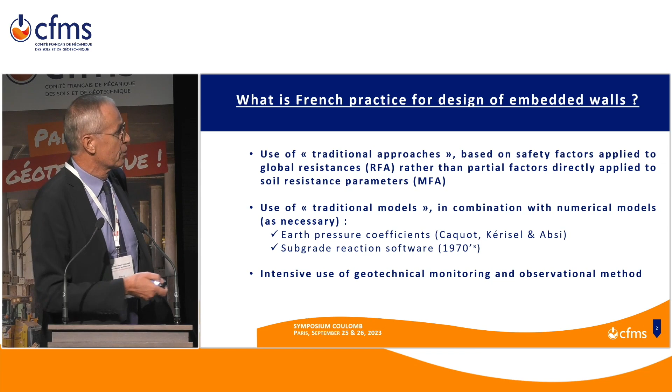But on the other hand, it seems that all existing and traditional models are relevant, provided that they are used within the limits of their validity range, which is maybe the most difficult thing that we have to assess in practice, because we are never very well aware of limits of models. We do not communicate enough on that. And clearly, this morning, I will try to focus on the limits of the models we use.

A quick mention of our practice for soil investigations. As everywhere, of course, we are combining lab tests and in-situ tests.

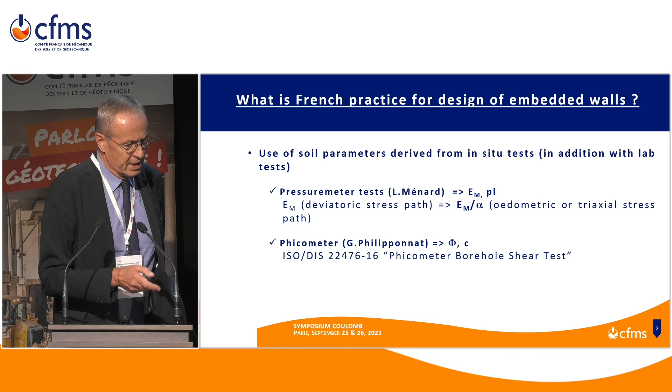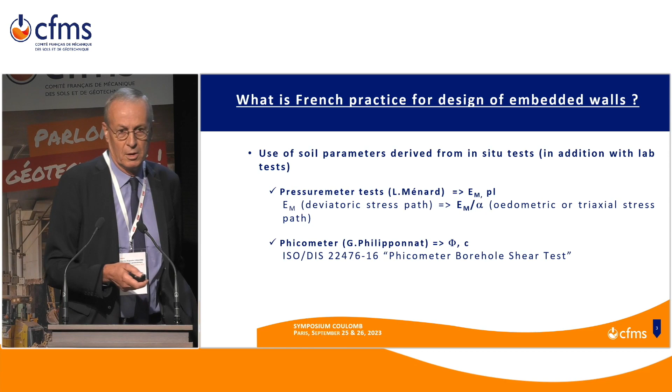I would just like to mention two specific French tests. First, the well-known pressuremeter developed by Louis Ménard, resulting in measurements of the pressuremeter modulus EM and the limit pressure PL. It's important to remind that as EM is measured in a purely deviatoric stress path, what Ménard called an extension stress path, to which some categories of soils may be more sensitive than others, some of them being potentially affected by early plastic strains, it was necessary for Ménard to introduce the structure coefficient alpha, which may itself be correlated to results of cyclic tests, as shown by Jean-Pierre Baud and by Yves Canepa, finally resulting in the reference modulus EM over alpha that we currently use for projects, and that better represents typical oedometric or triaxial stress paths, or more generally, stress paths including a significant isotropic component.

Less known is the Phicometer developed by Gérard Philipponnat, which completes the measurement of pressure exerted on the borehole wall by a measurement of shear resistance, so that it's possible to have an in-situ measurement of these two important parameters in Coulomb's criterion: friction and cohesion. Good news is that this test should, in the near future, be the object of an international ISO standard, the Phicometer borehole shear test.

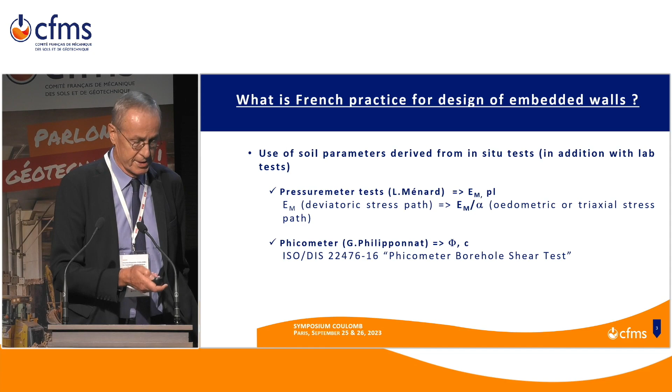Now, getting to the heart of the matter, I will briefly mention this very important ultimate limit state for embedded walls, what Eurocode 7 calls the rotational resistance. That just consists of checking that the embedded part of the wall is sufficient to mobilize the required level of passive resistance.

We are typically currently doing that, just checking that the ratio between the available resistance derived from passive earth pressure coefficients and the mobilized resistance derived from SLS, serviceability limit state calculations, is not less than a ratio typically in the range between 1.4 to 1.9, in line with the requirements of the resistance factor approach.

This is indeed different from the MFA, represented on the right, that requires producing ULS calculations, including partial factors applied to friction and cohesion, resulting in both a reduction of passive resistance and an increase of active pressures, and finally a significant effect on ULS solicitations and structural design.

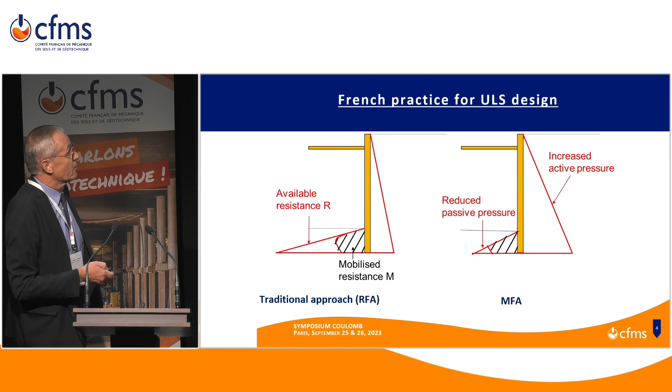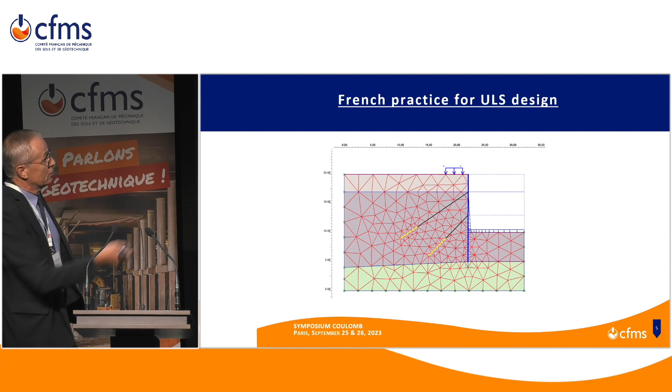Of course, this was the object of many discussions during the Eurocode process, and many comparisons were made. I would like to present one provided by Christophe Baudouin, the example of a sheet pile wall with two levels of anchors, for which a comparison was provided between the blue curve and others.

The blue curve represents bending moments derived from SLS calculations, so without any partial factor being applied. The red curve is derived from the blue curve by applying a multiplicative factor of 1.35, in line with classical structural calculations for ULS design.

That is our practice. The green curve derives from MFA with partial factors of 1.25 applied to friction and cohesion, for tangent of the friction angle and cohesion. We can see that the effect is very significant.

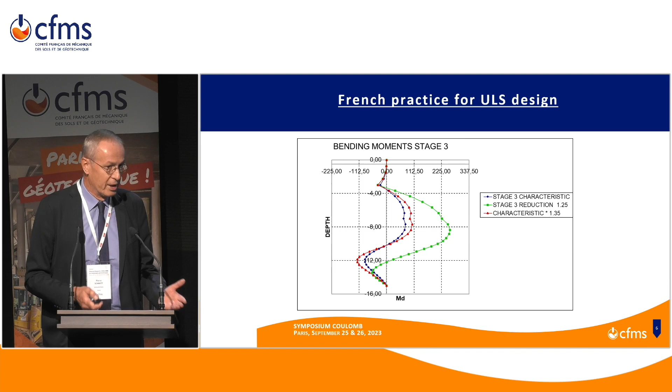Even if it needs to be emphasized that structural codes for steel structures make it possible, and even recommend, to consider plastic hinges within the structure of the wall to create some redistribution and finally reduce these huge bending moments. But unfortunately, this is not common practice for thick concrete structures such as diaphragm walls, although it is, in that case, of the utmost importance to avoid excessive densities of steel reinforcements that could prevent proper concrete placement under bentonite mud. This may explain why, in fact, we definitely prefer the red curve compared with the green one.

Even if we are, of course, aware that 1.35 is not such a high safety factor to deal with all geotechnical uncertainties, so that we need to be very careful when considering properly geotechnical limit states.

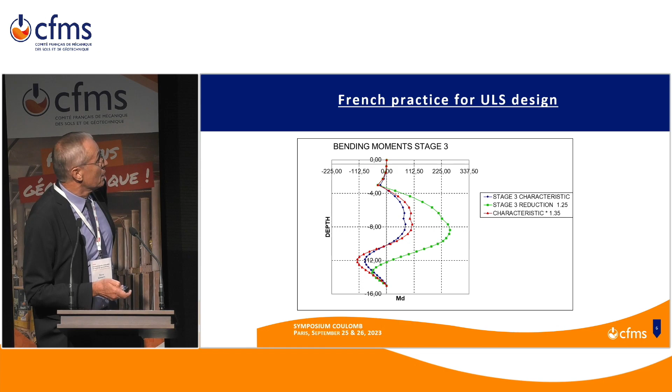A question that arises is when moving from left to right, how can we be sure that we are not crossing the borderline delimiting the validity range of conventional models we use, relying on Coulomb's method or active earth pressure coefficients, since there is an implicit assumption that overall displacement is equal to 0, or at least small enough to ensure no risk of the soil mass moving toward the wall, preventing decompression and entering a passive state instead of an active one.

This is a limitation that the model itself cannot predict, since it doesn't pay attention to overall displacement. So maybe in practice, the only indicator we have to check this is the safety factor relative to overall stability.

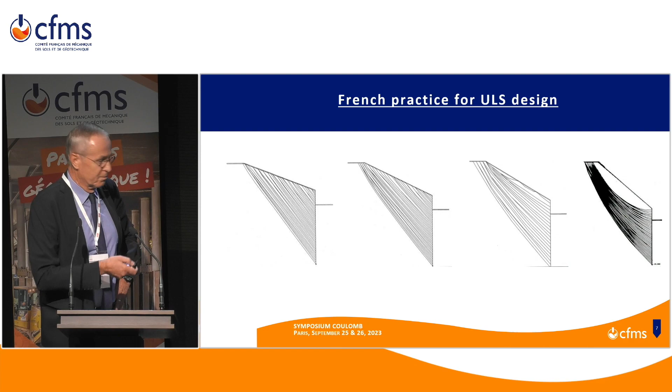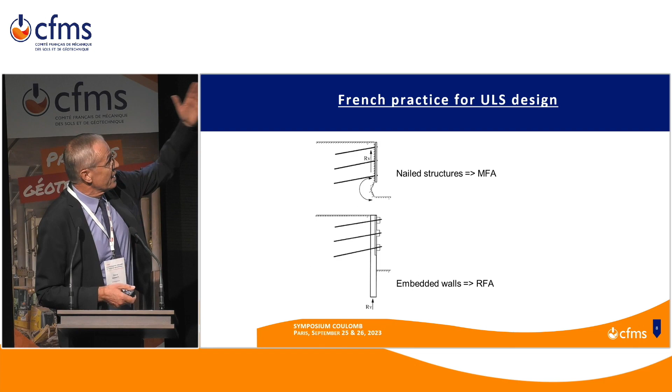Finally, to conclude with ULS practice, in France we do not hesitate to consider different design approaches for different structures. For instance, for nailed retaining structures built during excavation, which generally have lower safety factors and non-negligible displacements, conventional models clearly do not apply, and we rather design by reference, the same way as for reinforcing elements in slope stabilization projects.

It seems relevant here to apply MFA, making the structural design directly linked to the results of overall stability calculation with partial factors applied to it, which is different from the situation for embedded walls, where we are farther from geotechnical limits and conventional models generally apply. In that case we preferably use RFA to better optimize the structural design. This is our philosophy.

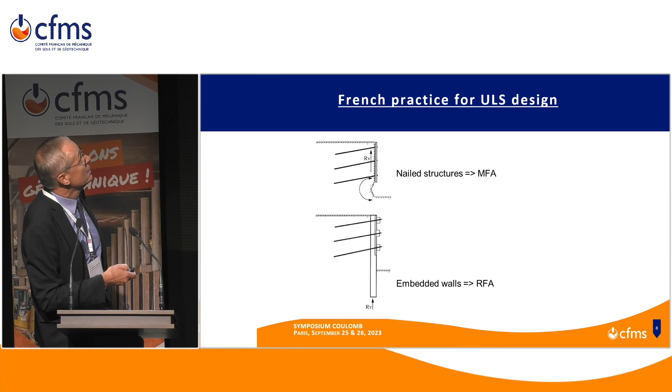The principle is to ensure that the anchor force applied in the soil is far enough from the wall to be dissipated by internal shear resistance within the soil, without generating an interaction with the wall or a possible increase in the active pressures considered in the design.

If the criterion is not met, it does not necessarily mean we are reaching an ultimate limit state. In fact, it's not really a safety factor that's required, but rather an indicator that if the criterion is not met, we need a more sophisticated model to account for the interaction that traditional models cannot consider.

The anchors are much too short compared with the great depths of the excavation, so we clearly had to use finite element calculations, and also adjust the construction sequence by undertaking the deepest excavation stages using a top-down sequence, while the upper slabs were simultaneously constructed, in order to take the part of the reaction that the short anchors themselves were no longer able to equilibrate.

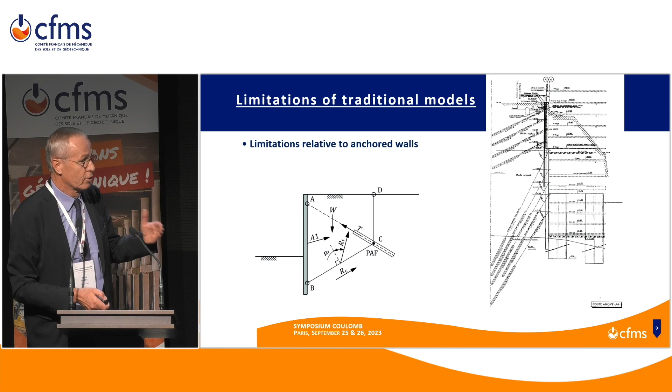Finally, geotechnical monitoring showed that the model was realistic, which would obviously not have been the case with only traditional models. Another limitation, already mentioned yesterday by Emmanuel Bourgeois, is relative to arching effects.

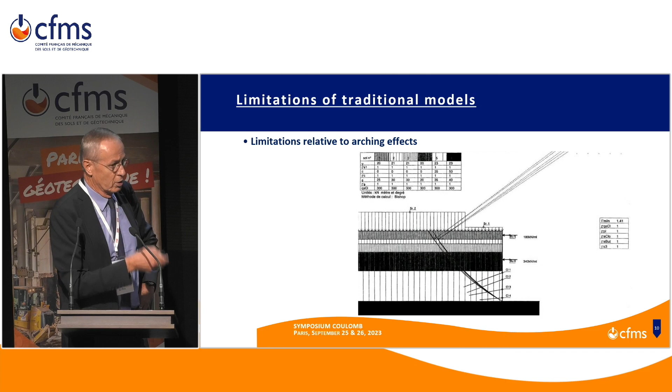In such circumstances it would surely be a mistake to rely only on traditional models, because as finite element calculations show, there is significant displacement at the level of the weathered rock, resulting in a vertical arching effect, and finally mobilization of passive pressure behind the wall at the level of the second layer of struts, with an increase in the reaction taken by this level of struts.

We presently have no indicators for that, other than common sense, recommending when using traditional models, especially when there is no water so all the action comes from the soil itself, to avoid mixing different rigidities of supports, as in this project, or when walls are flexible, to avoid excessively high spans between two successive levels of supports, especially when supports are passive, because traditional models will not consider the possibility of passive pressures outside unless supports are pre-stressed. So this is indeed a limitation that needs to be considered.

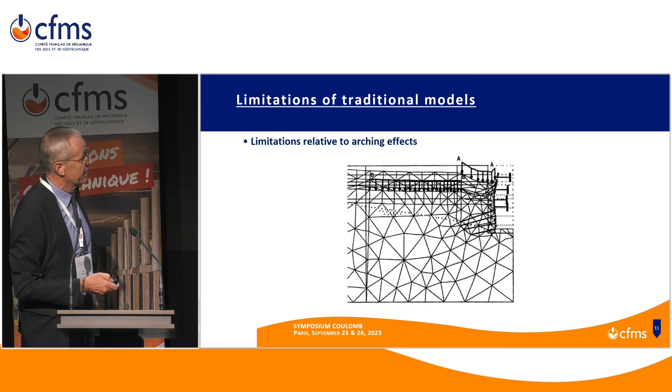Now looking at what occurs on the other side of the wall, I must confess I feel a little confused presenting, in front of scientific assistants today, such a basic model as the subgrade reaction one. It consists in representing all the stress-strain behavior of the soil on the passive side, between plastic limits, by a single spring coefficient supposed to represent everything, based on assimilating the soil to independent springs. That is obviously not very realistic.

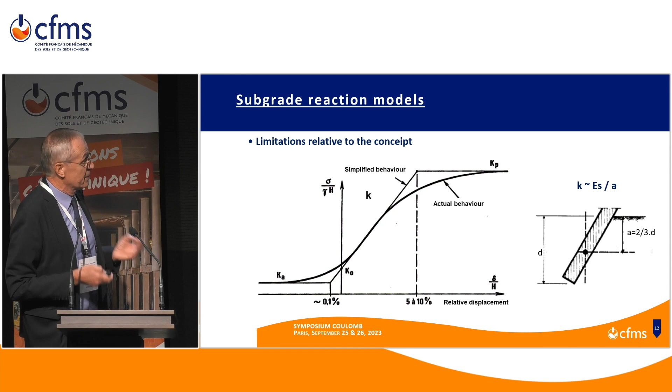The answer lies in the geotechnical monitoring we undertook from the beginning of the 80s, which showed, as in this example taken from the construction of the first line of the Lille Metro, that this model may provide good results compared with topographic and inclinometer measurements. But of course major adjustments are necessary.

First of all, the assumption A equal to 2/3 of D: we can see here that it may be relevant for the last stage of excavation, but not for the intermediate ones, because for the intermediate ones the embedded depth is much higher, although the interaction height A seems to remain of the same order of magnitude.

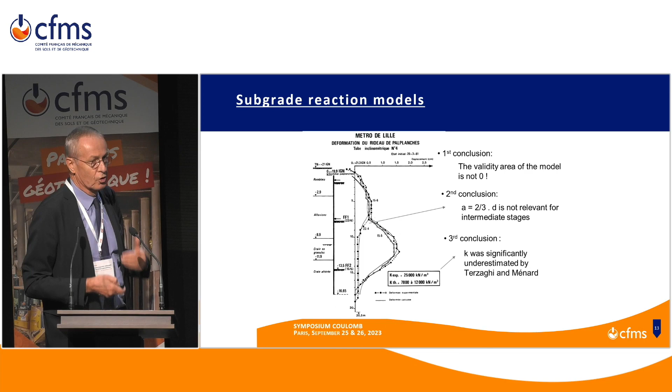Also, initial predictions and estimations by classical authors such as Terzaghi and Ménard were significantly underestimated. So a lot of back analysis was necessary before coming to a synthetic expression. Of course results are very scattered, but an average figure is provided by this formula: K equals 3.6 times our reference modulus Em, upon alpha, divided by A, which is about 3 times higher than initially proposed by Ménard, probably based on an extrapolation of databases mostly relative to foundation structures.

But what is difficult here is that at design stage we don't have inclinometers to provide a relevant value for A. So we have to rely on the so-called theory of beams resting on elastic supports, beam-on-spring models, assuming for instance that the embedded part of the wall may be assimilated to a vertical beam, the object of which is to transmit to the soil under the excavation the overall forces exerted by the upper part of the wall.

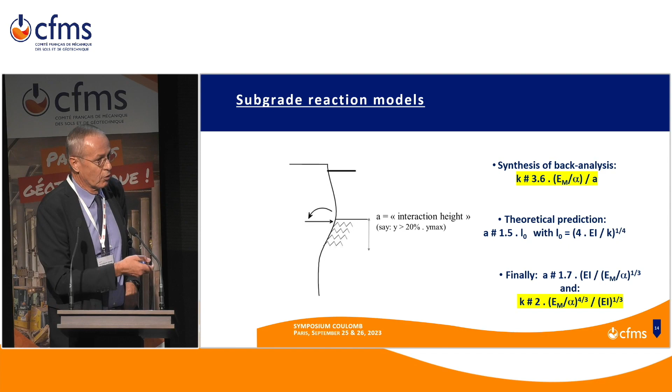Then the theory may provide an analytical expression of the interaction height A, which is in the range of 1.5 times the elastic length, itself traditionally expressed as 4 times the bending inertia of the wall divided by K, to the power of 1/4. So finally, A depends on K and K depends on A. Mixing these expressions, we get an expression of A that is surprisingly and generally in good agreement with inclinometer results, and an expression of K that only depends on the soil modulus and the bending inertia of the wall, which we currently use for projects with reasonably good results.

As shown in this example, taken from a project in Colombes near Paris, for which we were very happy to have very dense and high quality soil investigations, we were very happy to achieve, without any back analysis being necessary, a perfect matching between results of calculations and inclinometers in all monitored sections.

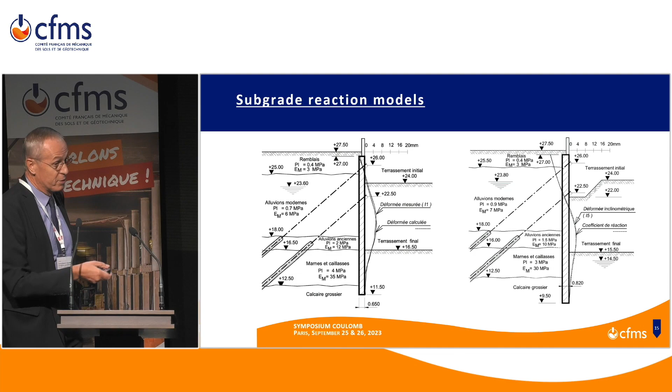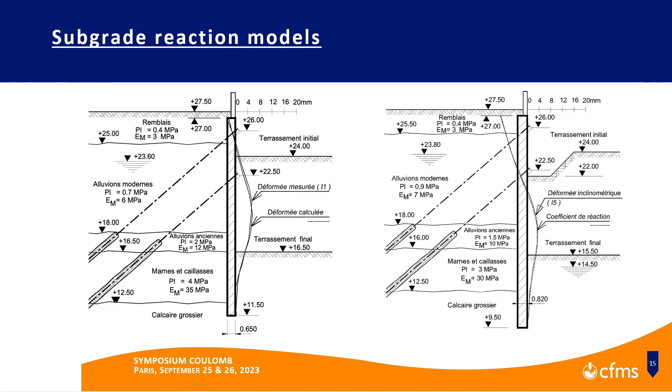But it is important to notice that this may occur, so there is no objective reason to reject this model. Now, the question, as I said at the beginning, is what are the limits of the model? Because obviously there are limits. For instance...

Limits may come from deep water pressures. For instance, it may occur that the embedded part of the wall is subject not only to mechanical forces, as in the general situation shown on the left, but mostly to hydraulic pressures, more especially when the wall had to be deepened to reach an impervious layer at depth for water tightness reasons, or when we are making pumping tests without any excavation.

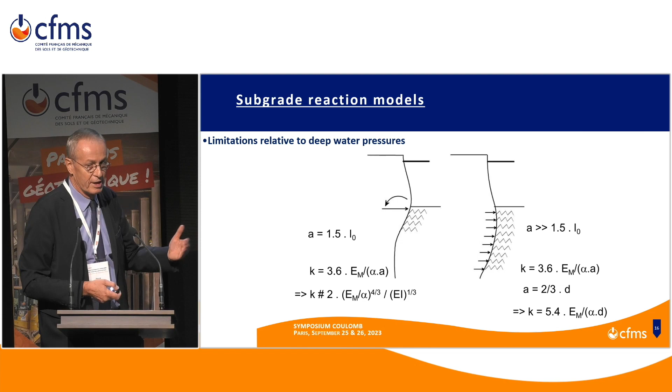In both cases, we can observe that A is no longer dependent on L0, but may reach in practice the total length of the height of the wall, or 2/3 of it, resulting in much lower values of K than predicted by the formula.

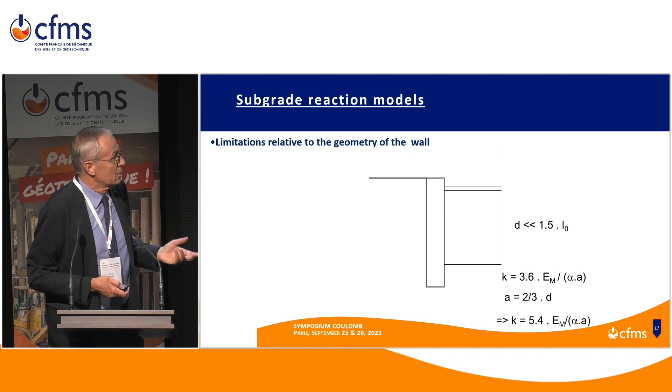On the contrary, it may occur that for short and rigid walls, the elastic length L0 may be huge compared with the depth of the embedded part of the wall. In that case, we clearly have to limit the theoretical expression of A to the physical height of the embedded part of the wall, or 2/3 of it, as proposed by Ménard, resulting this time in a higher value of K.

For cut and cover sections, it may occur that the 2 facing walls are close to each other, possibly resulting in interpenetration of passive wedges, causing an underestimation of passive resistance by both passive earth pressure coefficients and also by the subgrade coefficient. This can sometimes be reasonably approached by Hooke's formula, considering the shortening of the trench of soil between the 2 walls, so another evaluation may be necessary.

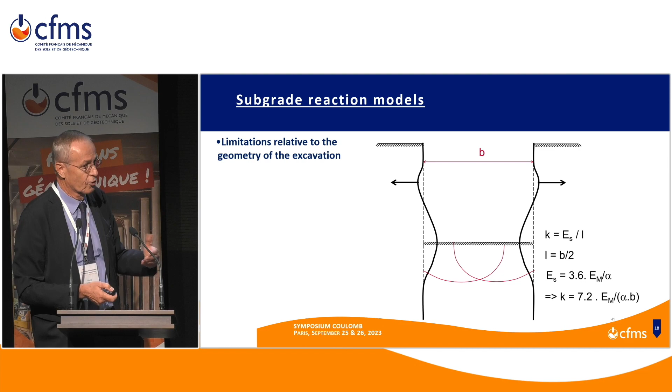Another limitation may come from time effects. In a project where we were happy to have very good matching between results and measurements, we were also happy to have long-term measurements, which doesn't very often occur. We could see that 1 year after the end of excavation, there had been, of course, some significant creeping of concrete.

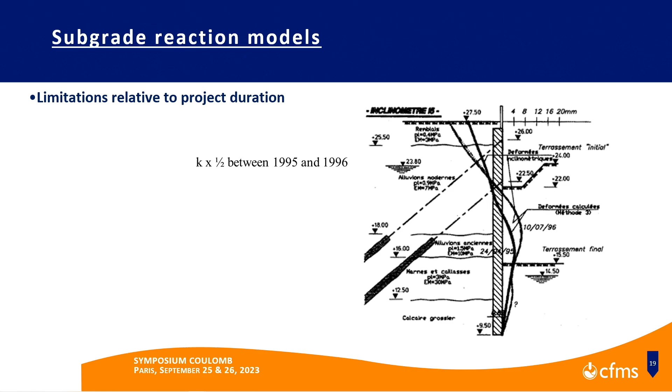That had been considered in the calculations, but we also had to divide by 2 the coefficient of subgrade reaction, which had not been really anticipated and was probably due to the creeping of the alluvium material under the great forces exerted by the permanent anchors.

But we still need to progress in our knowledge, more especially because we have to confess that our databases are mainly relative to short-term conditions, since unfortunately geotechnical monitoring generally stops after construction is finished. So we would need more long-term measurements to progress.

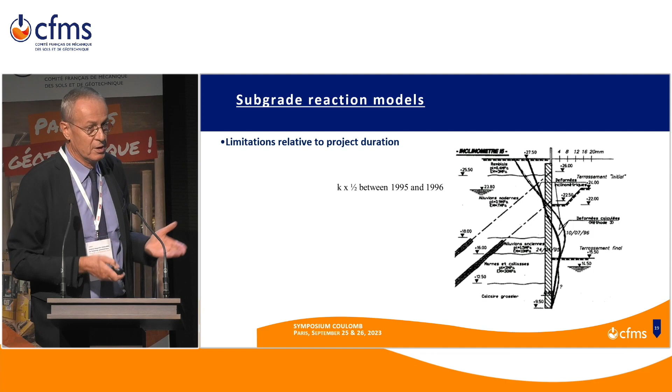But finally, you could say, okay, let's take the point that traditional models may provide good results, but isn't it a little bit complicated to always be aware of the limits, always aware of the physical mechanisms involved in the project itself? Wouldn't it be simpler to systematically use numerical models that account for everything, where you just introduce data into the computer and wait for the results?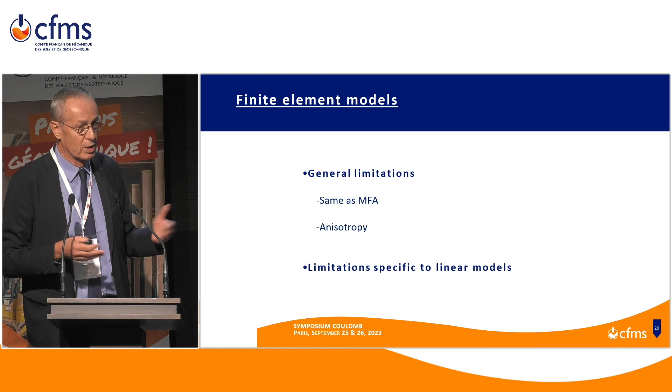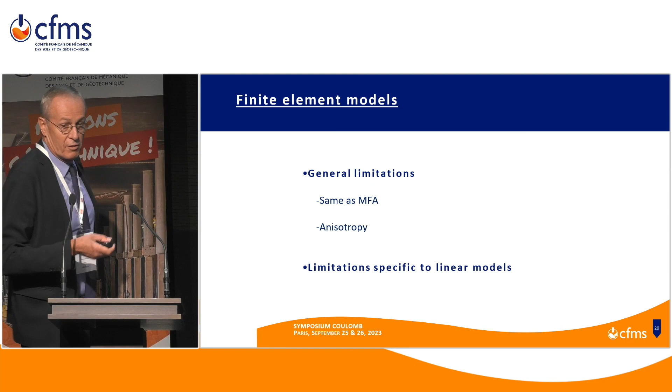Clearly in France we do use numerical models, but we're not prepared to use only numerical models, for various reasons. One of them is that these models in practice are not so simple to use for many practical and geotechnical reasons.

There are also some limitations. One is relative to ultimate limit state calculations, because generally numerical models are used in combination with MFA, since it is much easier to place partial factors on friction and cohesion. But for reasons I tried to explain, we are rather reluctant to use the MFA systematically.

Another limitation is relative to anisotropy, because there seems to be a consensus in practice to neglect anisotropy, since that would necessitate more sophisticated models and parameters to measure. But it may occur that alluvium soils are significantly anisotropic, which may explain why sometimes we were a little disappointed when comparing with geotechnical monitoring results, especially when checking both horizontal and vertical displacements. So this is also a small limitation.

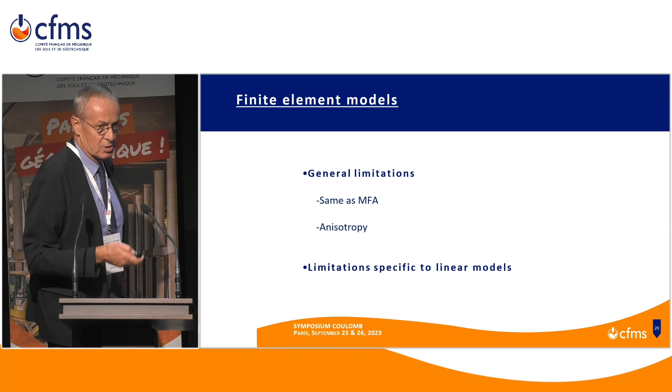Another limitation, also mentioned by Emmanuel Bourgeois, is relative to linear models, to the point that during the Eurocode discussions, it was sometimes considered that it would be wise to prevent the use of linear models for excavation projects.

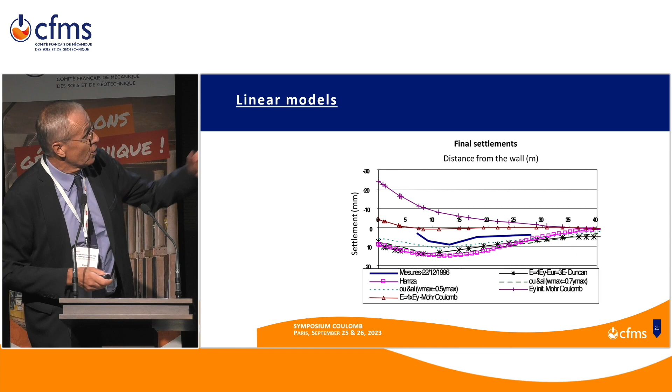The reason may be understood based on this example from the construction of the second line of the Cairo metro, where purely linear calculations significantly over-predicted the heave due to excavation, which was a huge unloading. Correct orders of magnitude compared with measurements could only be provided by non-linear models or by empirical formula.

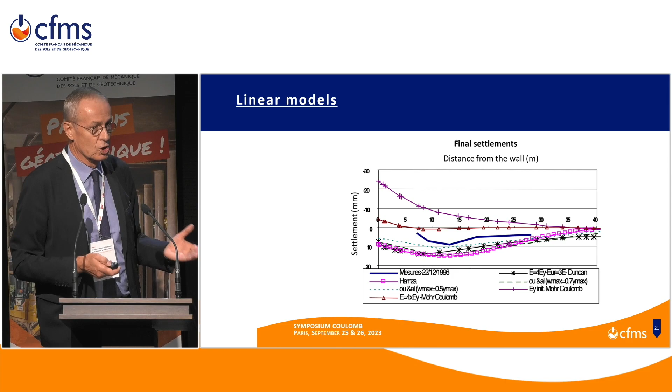But is it a reason to reject linear models when just checking for horizontal deflections and bending moments? It would be a paradox to accept subgrade reaction and reject finite element models. So in both cases, the most important question is which equivalent modulus should we use to get realistic results with linear models?

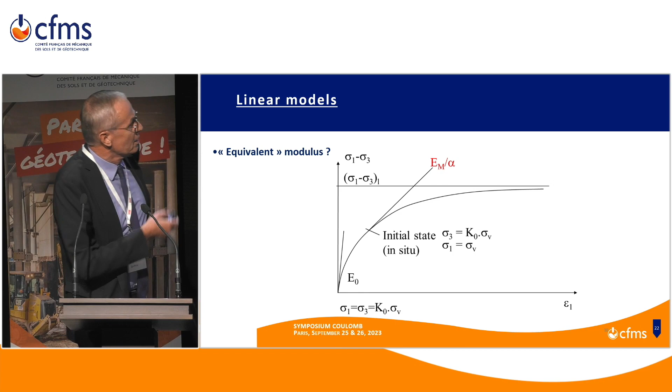Thinking about that is provided by this stress-strain relation in the case of a triaxial test, in which we tried, with Michel Gambin, a well-known Pressiomètre specialist and one of Ménard's colleagues, to represent what in Ménard's mind could have been the EM upon alpha reference modulus. We concluded it should be some kind of tangent modulus starting from initial in situ conditions, as for a Pressiomètre, which needs to be distinguished from the E0 initial modulus that characterizes the soil sample when it has just been isotropically reconsolidated without any deviator applied yet.

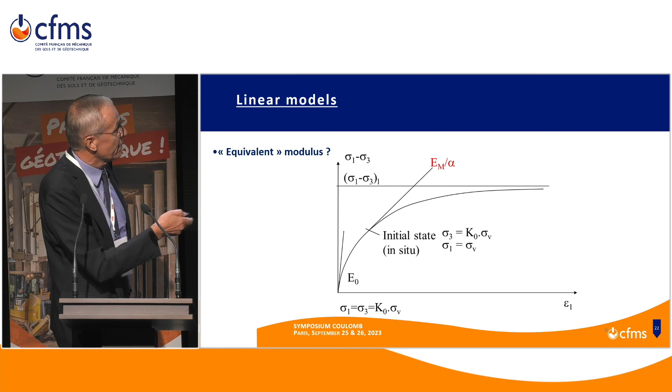For deviators, when soils are normally consolidated, we can have a rough estimation. In K0 conditions, we can derive it from the Jaky formula. In plastic conditions, from the Coulomb criterion. With this very rough calculation, it comes that the at-rest deviator is equal to the limit deviator divided by 2.

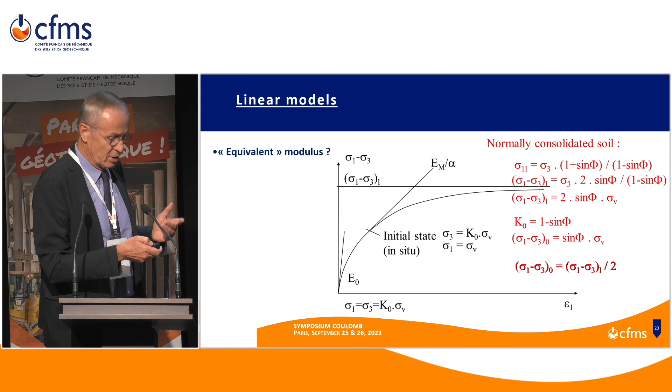Although very simplified, this is interesting because it makes a link with the E50 modulus, which is a reference modulus in a well-known international finite element software.

If we assume, in addition, that the stress-strain behavior is hyperbolic, it comes that the tangent E50, our reference EM upon alpha modulus, is equal to the secant E50 divided by 2. This may explain why, in practice, when comparing results of nonlinear calculation with the HSM model against geotechnical results, we get rather good matching using values of E50 in the range of twice EM upon alpha.

That tends to demonstrate that Michel Gambin's representation is rather relevant. But also interesting to notice is that starting from the same initial conditions, if we consider not a primary loading as for a foundation, but an excavation project where we at least partly go into an unloading, reloading process, with unloading due to excavation and reloading to mobilize passive earth pressure.

This is a situation where you can understand why linear models may be realistic for unloading, reloading stress paths, which might also partly explain the success of subgrade reaction models.

We may understand why it is necessary to consider higher values of the equivalent modulus, lying between E50 or 3 times E50 — generally considered the order of magnitude of the unloading, reloading modulus — and between 2 and 6 times the EM upon alpha, with an average value of 4 times generally providing realistic results when comparing geotechnical monitoring with calculation using only a linear model.

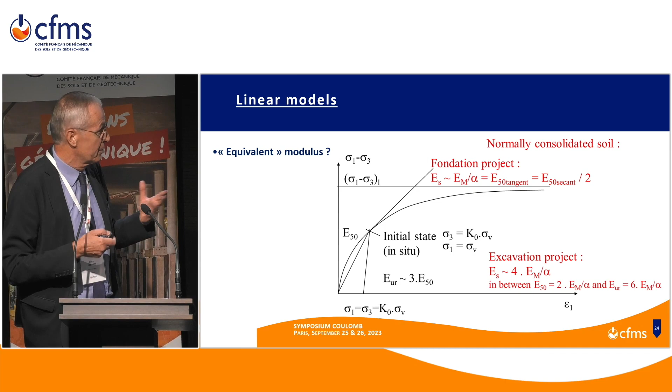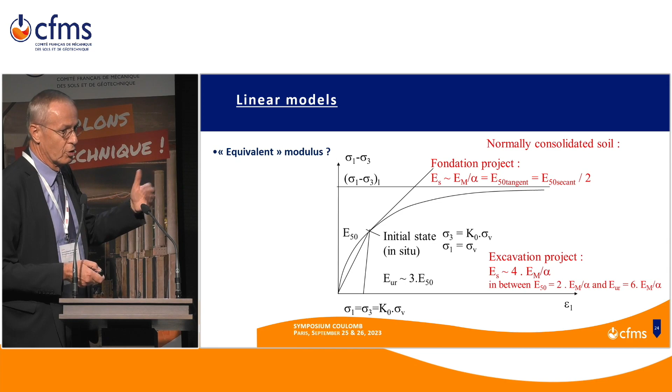Although it must be emphasized that for significantly over-consolidated soils or soils with microstructures, as I said yesterday, we may have to consider higher values of the equivalent modulus, both for excavation and for foundation projects.

My conclusions, finally: traditional and numerical models seem consistent with each other. No war seems necessary between supporters of models. The same can be said of MFA and RFA design approaches, which are all relevant and useful. It would probably have been a mistake to reject or favor one of them, as was sometimes considered during the Eurocode process.

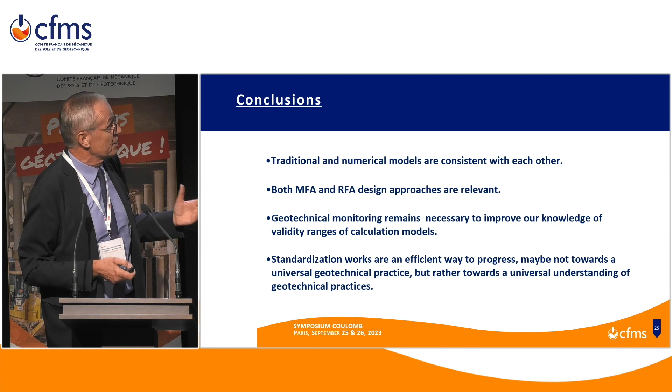Of course, geotechnical monitoring is very important and necessary to still improve our knowledge of models and their limits. We still need to progress on that.

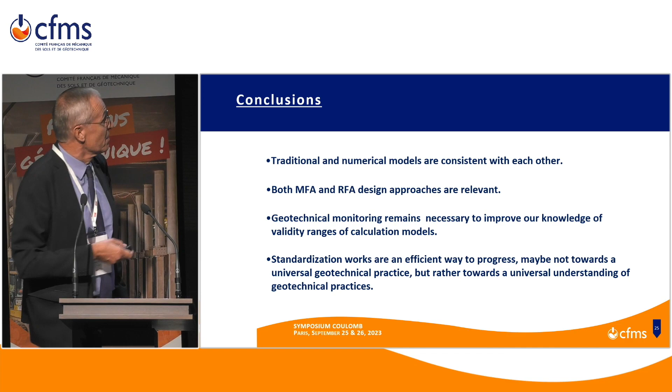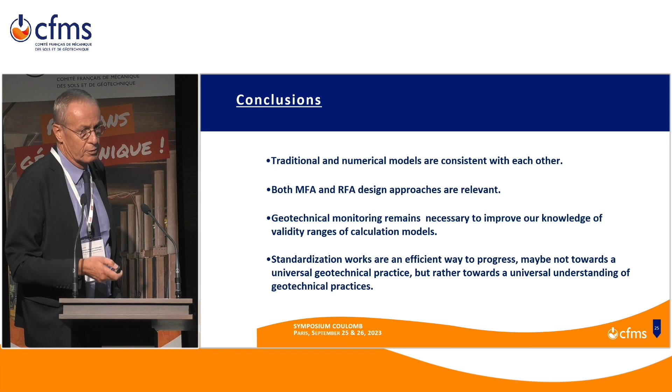My personal conclusion is that maybe standardization work, such as Eurocodes, should not aim at looking for a universal geotechnical practice, but rather for a universal understanding of geotechnical practices.